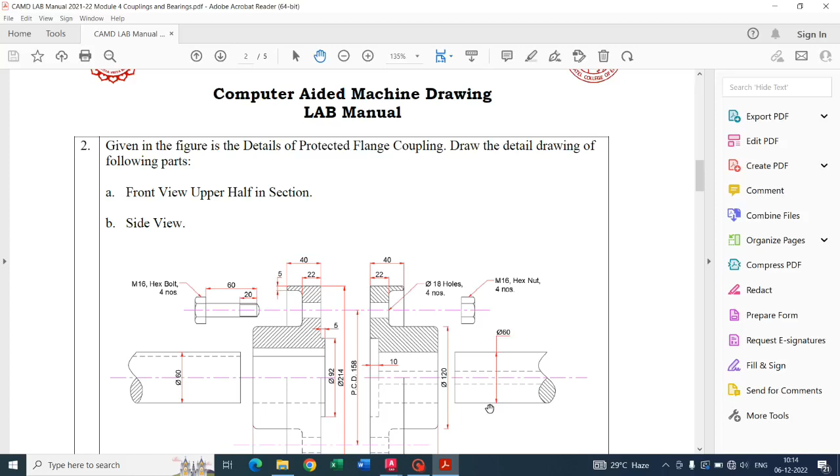Today we are going to see how to make 3D modeling of protected flange coupling. We are going to make three parts in 3D model. We are going to assemble the parts together and make the assembly, and then we have to plot the assembly drawing as given here.

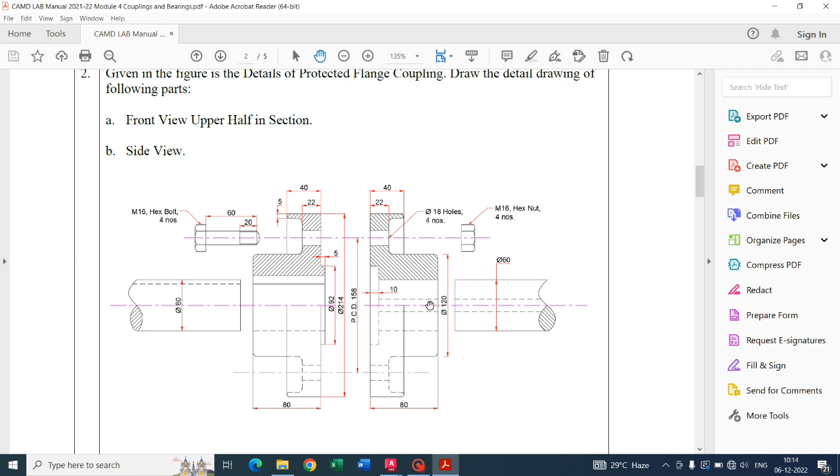So the question is, given in the figure is the details of protected flange coupling. So these are the detailed drawings of the protected flange coupling. We have to draw the assembly, not the detailed drawing. We have to assemble all the parts and draw the following: front view, upper half in section, and side view. We already have front view, upper half in section for the details. We have to assemble the parts and we have to draw the lower half.

Okay, so here we will start with the drawing. So we'll go to AutoCAD. Whenever we are opening a new file, we will make sure that we are switching to 3D modeling. Now once we are in the 3D modeling, we can see the grid, and we will change our view to southwest isometric so that we can see all three axes.

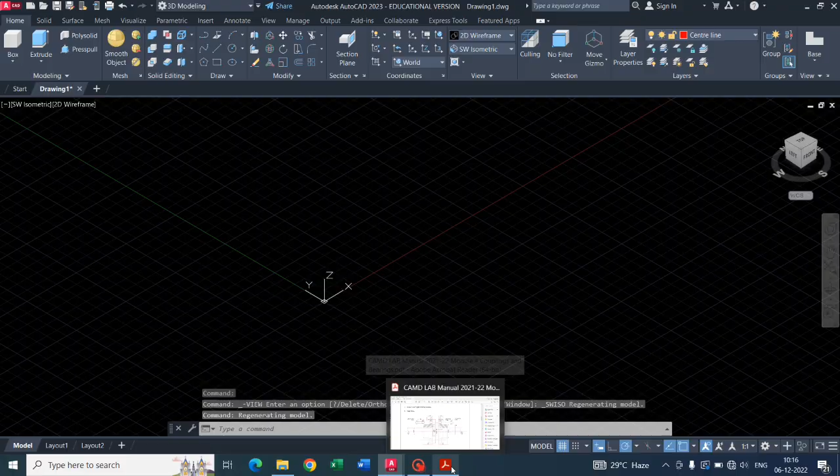Now we will see where we have to start. We will take the shaft first because it is the simplest part to be drawn. In front view, the shaft is only a rectangle. So when we have to draw a cylinder of the shaft, we will have to draw it in the left hand view because the circular face will be seen in the left hand view.

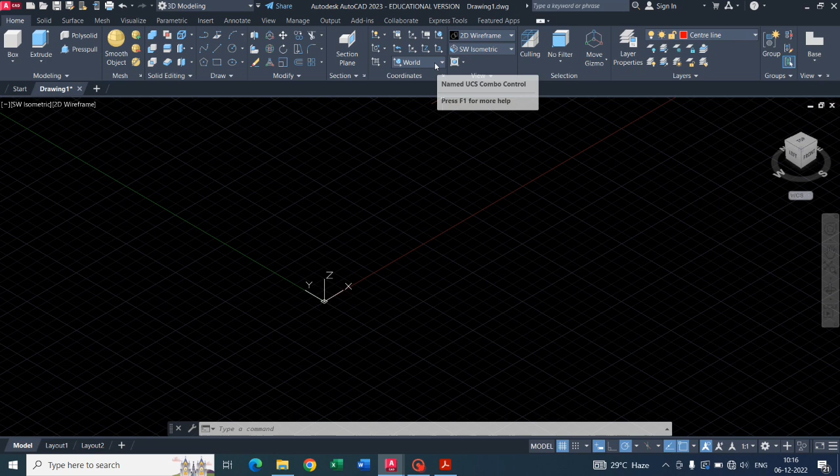And in most of the cases, for example this flange, you can see all the circular faces like the 92, 214, all these circular faces are seen in the left plane. So most of the parts of 3D modeling will be in the left plane. So first let us set this in the left plane. Our UCS will be set in the left plane, and you can see our grid is aligned in the left plane.

Now the shaft dia is 60. What should be the total length? The shaft should be inserted inside the flange in such a way that this edge should reach here, in this flange A. So this is flange A and shaft A, and respectively, this will be flange B and shaft B.

In flange A, when the shaft A goes in, the total width of the flange is 80. So our shaft should come at least something out. We will take at least 20 mm outside. So the total length of the shaft will be 80 plus 20, that will be 100. So dia 60 by 100.

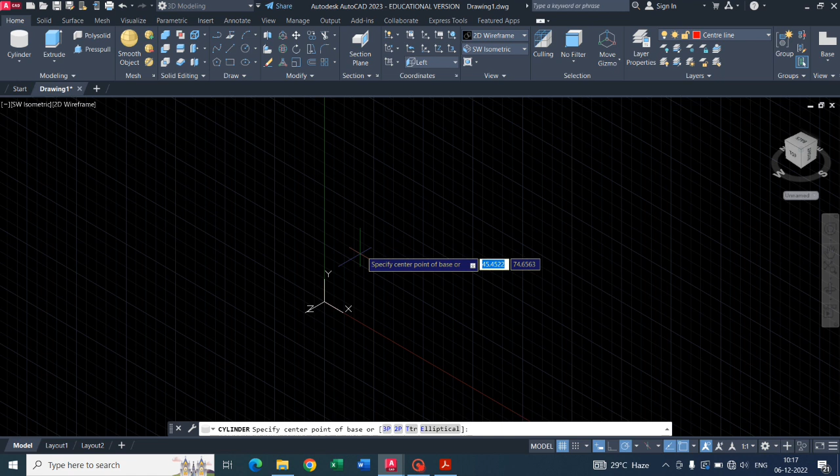So we can directly go here and make a cylinder in the left plane. Click anywhere for the circle. For diameter I will press D, enter, and I will enter diameter 60. Now I will extrude and I will enter length 100.

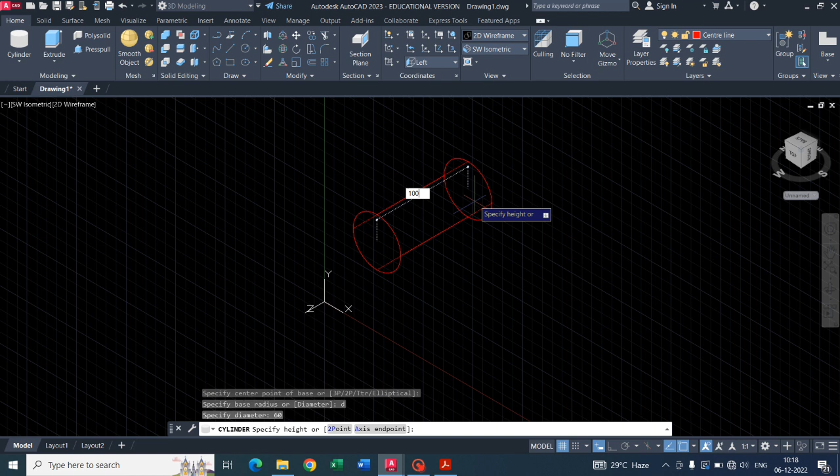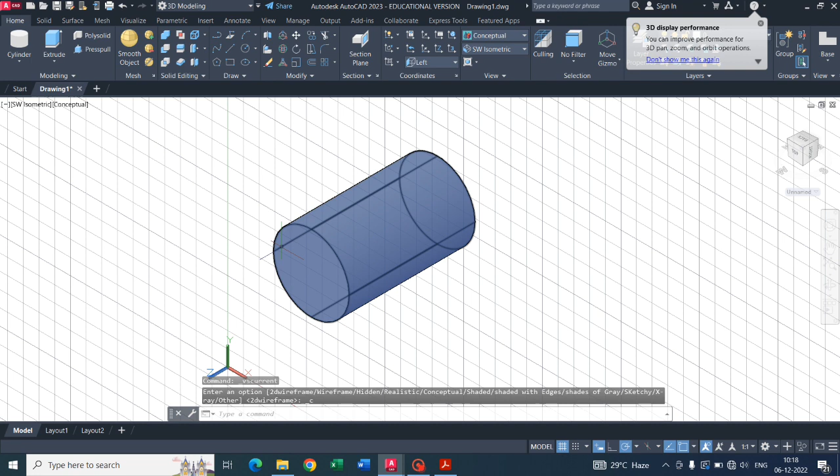My layer was in center, so I will switch it back to default layer 0, so whatever I draw is in the default layer. Now I will see this in conceptual, and you can clearly see a cylinder is created in the 3D modeling. For the time being I will switch off this grid; it is not required now. So we have the shaft.

Now what we require in the shaft is the keyway. The shaft dia is 60, so what should be the keyway dimensions? For the key dimensions, we have shaft dia capital D equal to 60.

Accordingly, the width W of the key will be D by 4, which is coming out as 15. The thickness of the key, T, is equal to 2/3 of width, so that will be 10 mm. So we have the thickness and we have the width, and we'll get all the other dimensions.

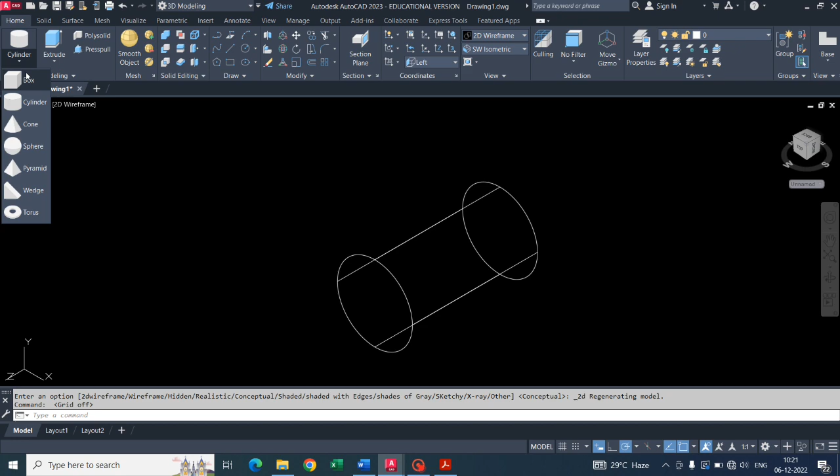Okay, so let's move back to AutoCAD and make a keyway. So in a key, first we'll make a key, and then accordingly we will align that to a shaft. So for making the key, I will directly go to the box. I'll give the cross section. My cross section is 15 by 10. So my cross section width is 15. I'll press tab, so it will go to the thickness, and 10 mm. Okay, I'll give the length.

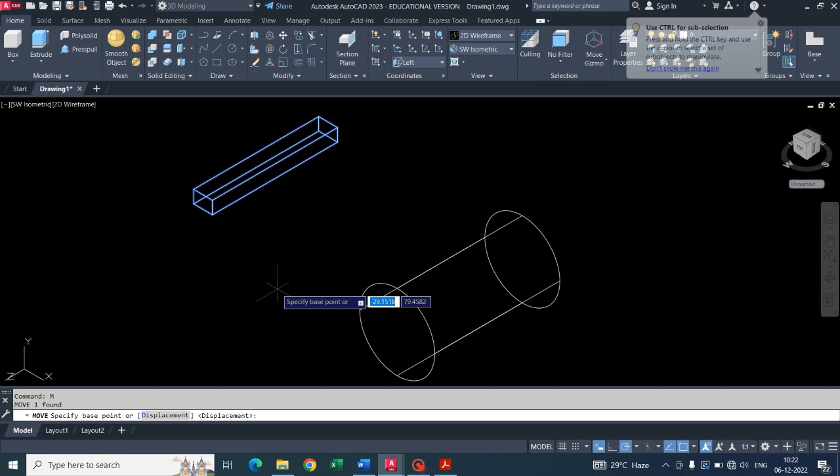The total length, right now I am making only the keyway, so according to the key dimensions, I will take 100 as the total length, which is the length of the shaft. Okay, now I will make this, and I will move this from the half. You will get a center point. If not, you can make a line like this, and you will get the center point of it.

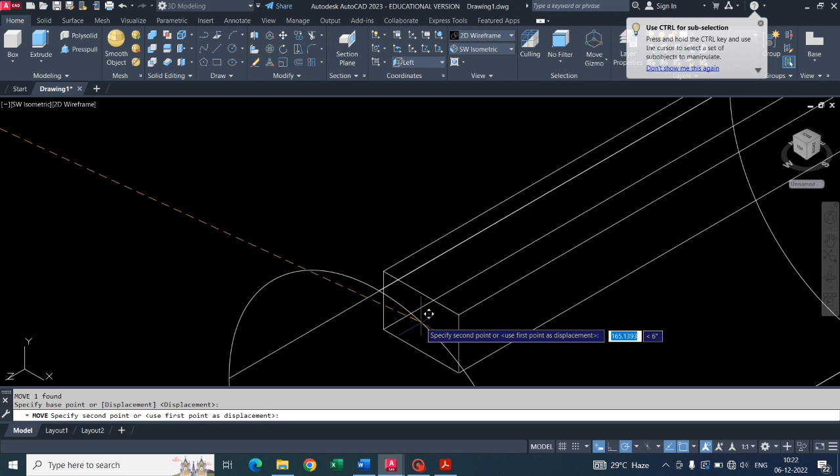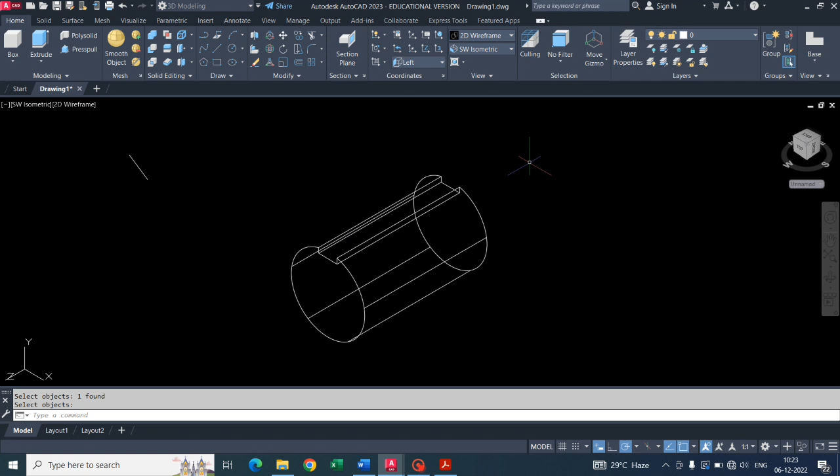So select, move from the center, that is the midpoint of this line, and put it on the quadrant point. You can see this is the quadrant point of the shaft. At the half, so you have half outside and half inside. Now I'll make the slot. In order to make the slot, I will use the command subtract. Select the solid, that is the cylinder first, press enter, and then select the keyway and then press enter. So here's the keyway that is ready for us.

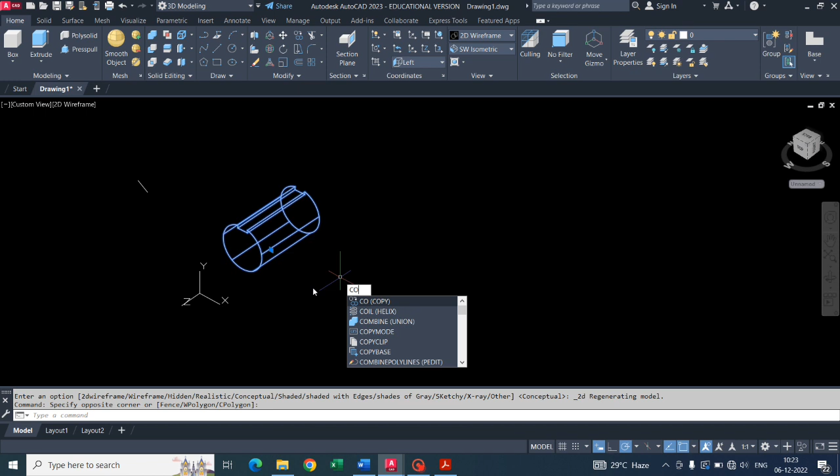It is a through and through keyway. It is not ending in between. It is through and through along the length. So similarly we want one more shaft, because if we see the details, it is on the other side. Only that this shaft will be rotated because the keyway is rotated. Here you can see the thickness of the keyway, whereas here you can see the width of the keyway. So I will take one more shaft. I will make one more copy of this.

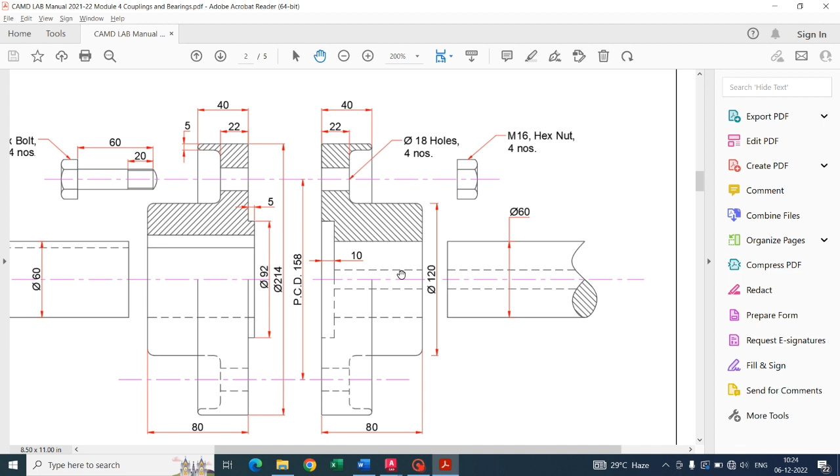And rotate it. Now where to rotate? Whether it is in front or back. So from this keyway, you can see here the details. It is clearly seen that even if the section is done, the slot is not visible towards the front, or towards the observer who is looking towards this particular flange. So obviously the keyway is on the back side. So we have to rotate this keyway on this side, because this is going to be our front, this is front, this is back.

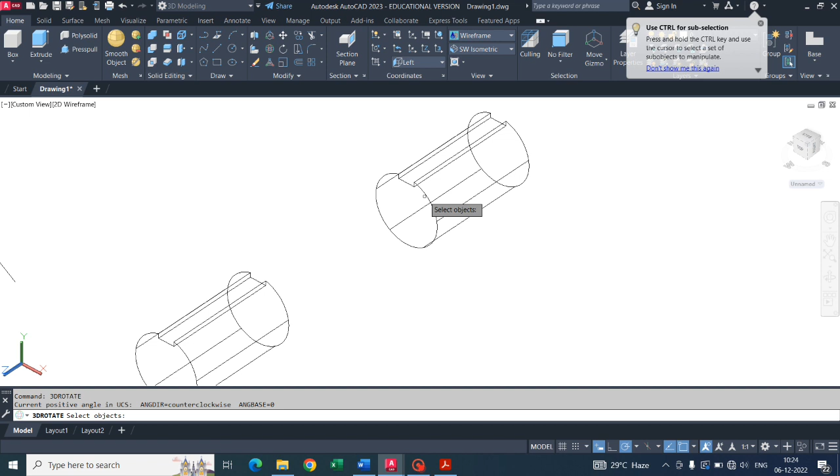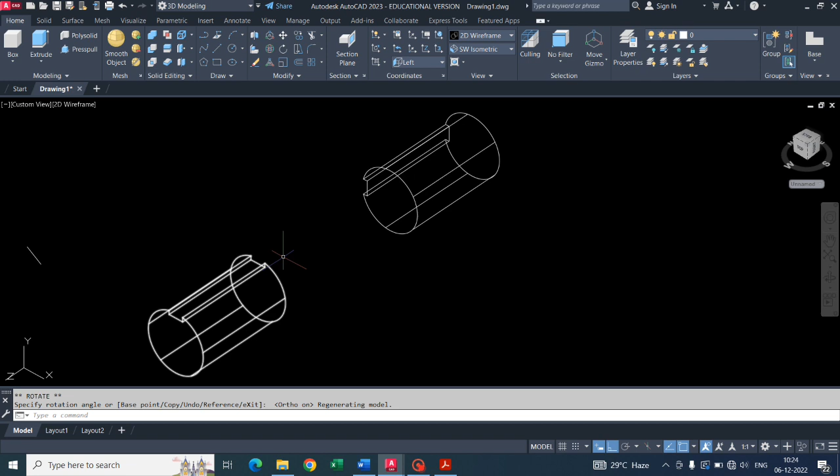So let us do 3DR, that is 3D rotate. Select this, select the proper axis of rotation, and in my case I'm taking this red color. You can also click on the ortho mode so that you can see here the preview. And rotate it. So one shaft is having keyway at the top, the other on the back side. So two shafts are ready.

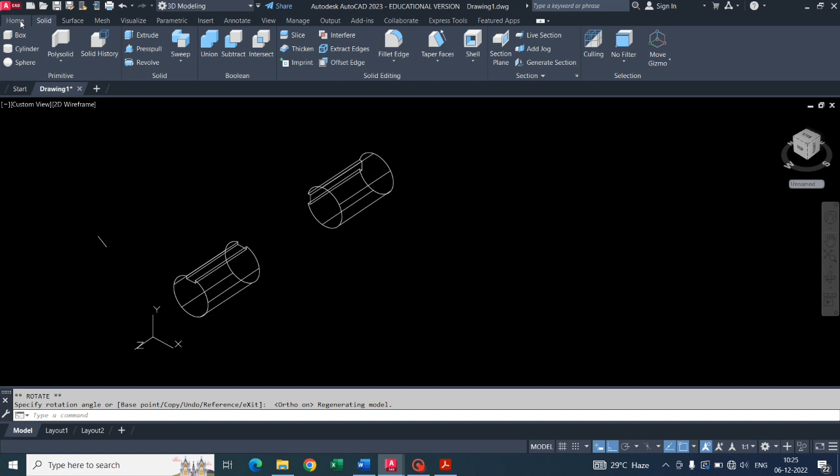Now I have to make the flange. In order to make the flange, first we will start with the dia 92 and 5. So I will go with dia 92. I will make a cylinder, again dia 92, and the thickness is 5 mm. So we have the cylinder of dia 92 and thickness 5 mm.

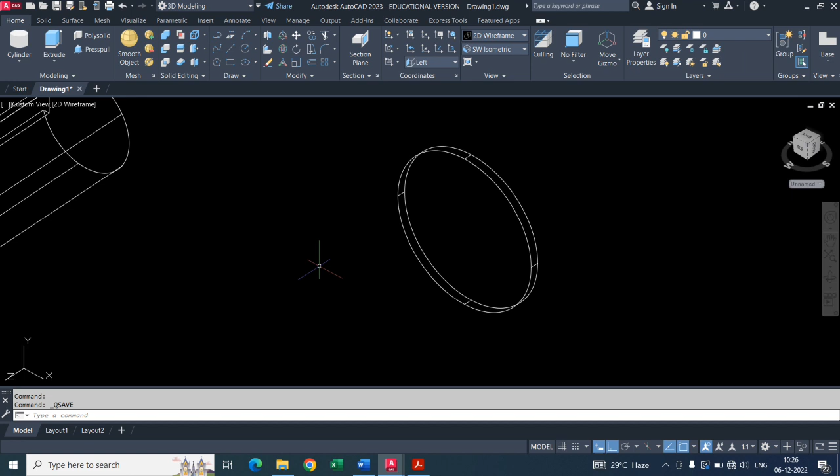So now we are going to make the flange, but before making the flange I will save my work. Saving your work is very important. I will save my work giving a file name. Do save your work regularly. It is just a matter of pressing Ctrl S on the keyboard, which will save your work.

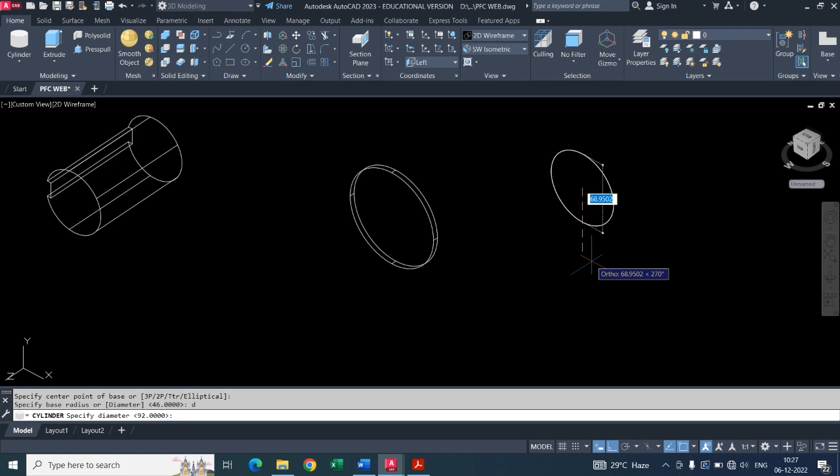Now here we have already drawn the dia 92 and 5. The next cylinder we are going to take is the dia 214, the outer cylinder, with thickness 40. So draw the cylinder anywhere and then we can move it. Dia 214 and thickness 40.

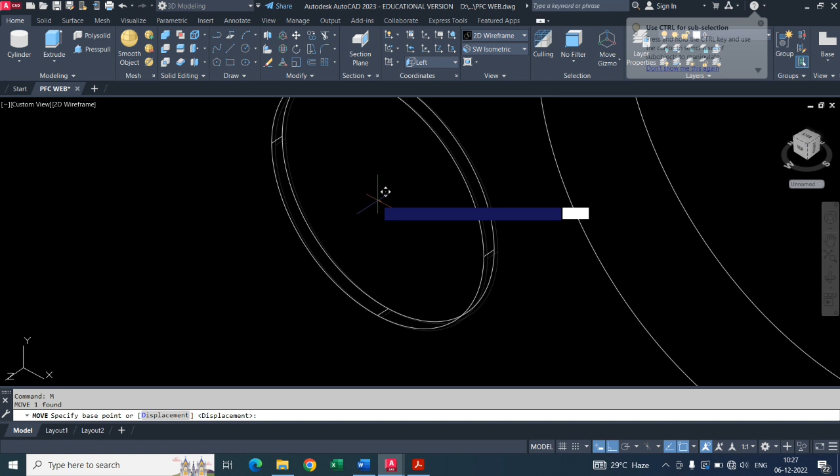Now we have to merge these two cylinders, dia 92 and dia 214. So we will merge this. I will take the center from the two and put the first one on the back, because these two centers are concentric to each other.

Now the next cylinder we have to make is the inner cylinder. For the inner cylinder, the diameter would be 214 minus 5 on this side, and minus 5 on the other side, so total minus 10. The total diameter comes around 204. So I will make a cylinder of dia 204.

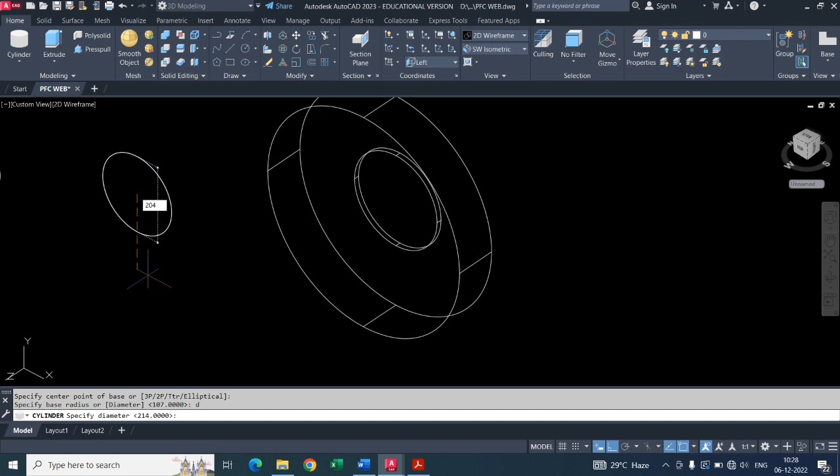What is the thickness? Thickness is 40 minus 22, that is 18, the remaining one. So 18, 18. Move this in such a way that we are taking the front face of this cylinder to the front face of the 214 cylinder.

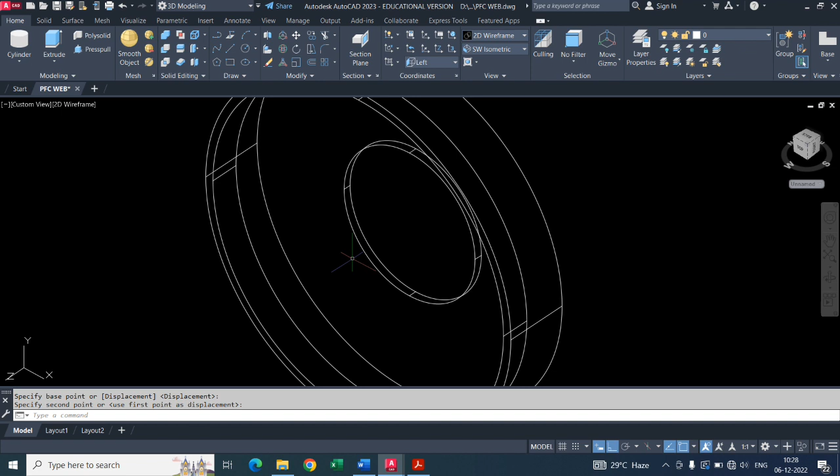When we see this in 3D, in the conceptual mode, they are merging into each other because we want a slot. So you can see this is the slot that is freed up, in order to create a rim.

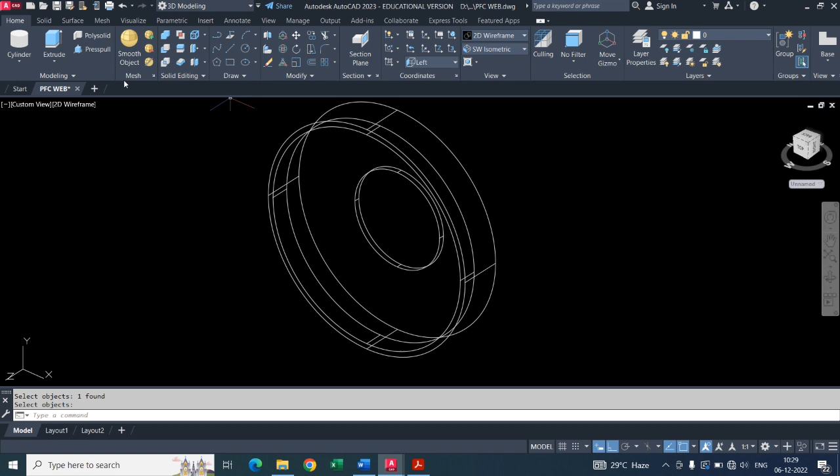Now we will go to subtract and make that rim. I will select the outer body first, press enter, then the inner body, press enter. And if you see now in conceptual, we have our rim which is ready.

Next we have the hub. The total diameter of the hub is given as 120. The total thickness, we can start from here. If we start from here, the total thickness will be 80, minus 22, which comes around 58. So this total length will be 58. So I will make one more cylinder.

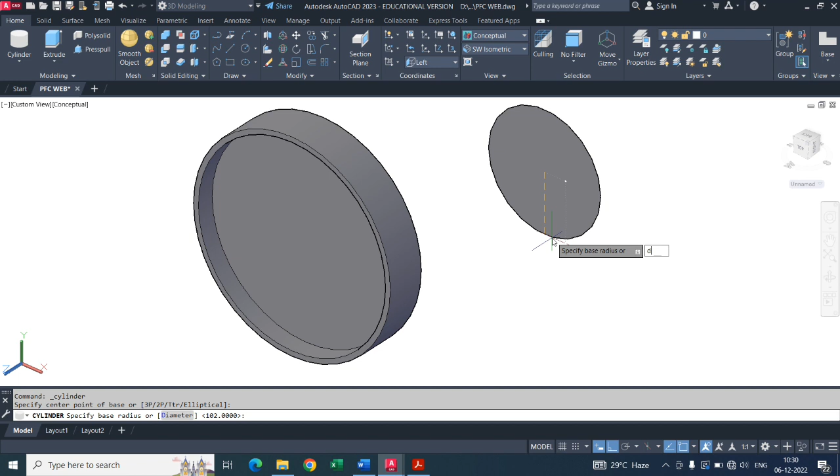Cylinder dia 120 and thickness 58. Once this is done, move this from the center to the center here, and check whether it is coming on the same center or not. Yeah, okay.

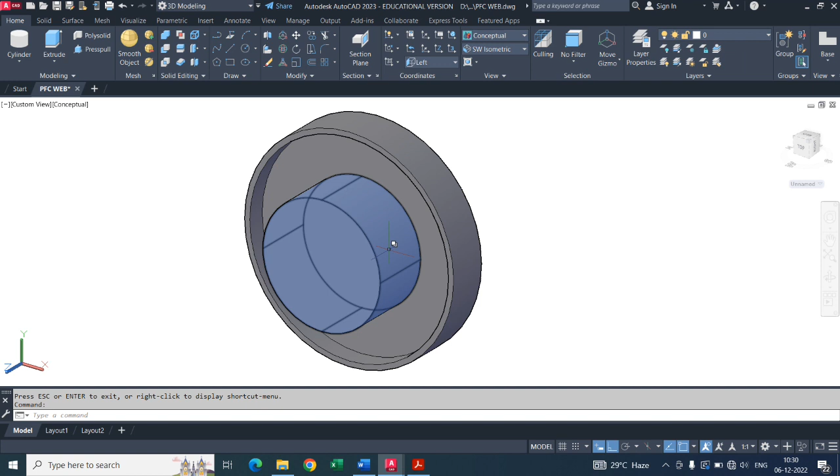Before we create these holes, what we'll do is first make a union, because these three cylinders, one, two, and three, are separate parts. So I will select union, select all these three cylinders, and press enter. So they are one part or one object now.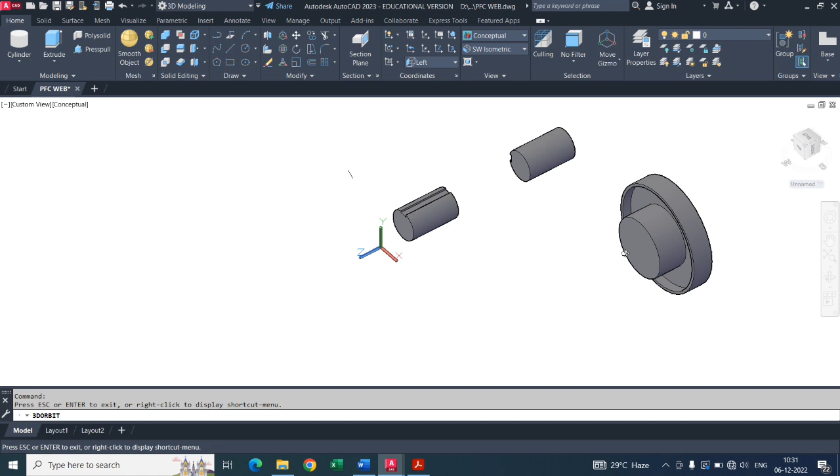Before doing any fillets, we have to make sure that we are doing this union function, so that the fillet direction will be correct.

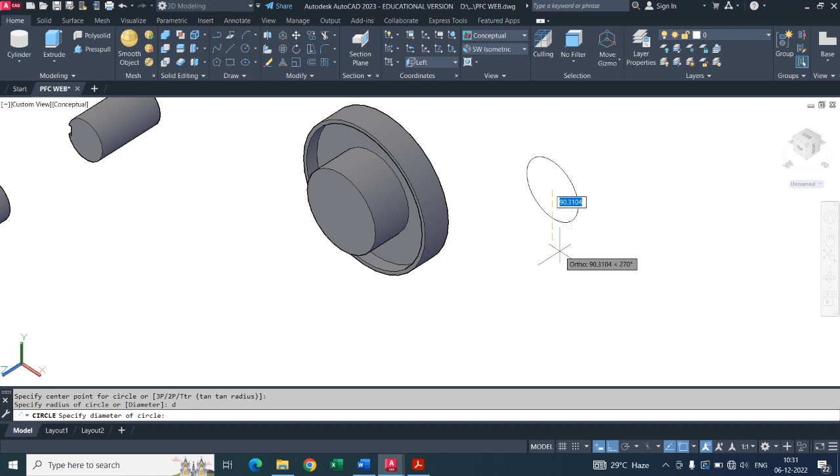Next we are going to make these holes, the holes for the bolt that will go through. These holes are given as dia 18, 4 numbers, with a PCD of 158. So first we will make a PCD circle of dia 158, which is the PCD.

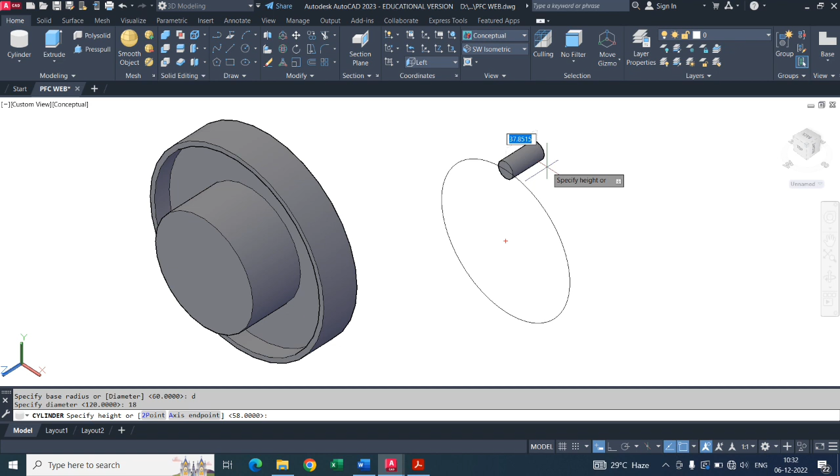Now I will make a cylinder of the same size, dia 18 by 22. I can take the length a little bit more, so dia 18 and length maybe 25, because we have a through hole.

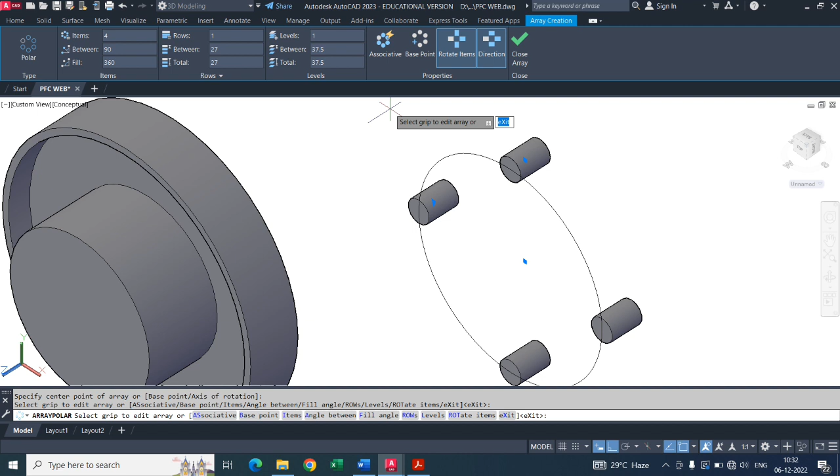Now here you can see 4 number of holes, and you will use array polar. Select this and give the center of the polar. Number of items is 4. Just click here and automatically it will take the 90 degrees. Make sure associative is unchecked, this is checked, this is unchecked, because we want all these bodies to be individual. Close array, and we have all these individual bodies here.

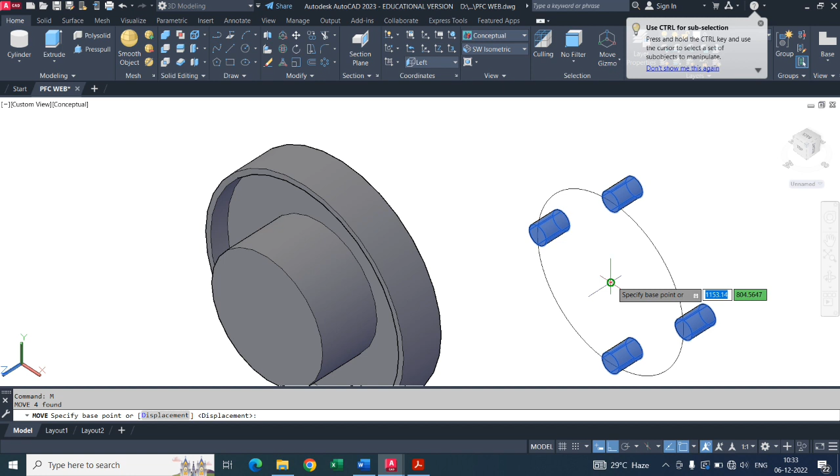Now these bodies are to be transferred onto this surface here. So I will select this one, two, select this, and move from here, from the center, and place it at this center.

Okay, so they are aligned properly with the face. This side will come out by 3 mm because we have given 25 mm as the length.

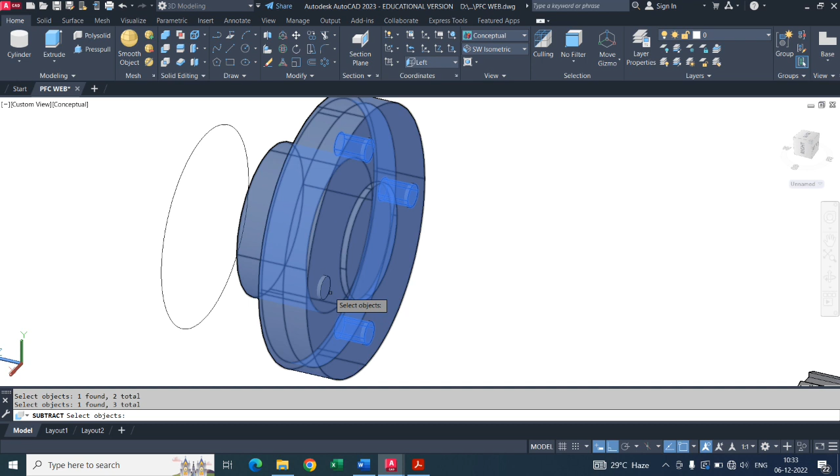Now I will have to select them and subtract them because we need to create a hole. So subtract, select this outer body first, press enter, select these cylinders, you can filter out, select the bodies properly, and 4, okay, then press enter. So you have the holes ready.

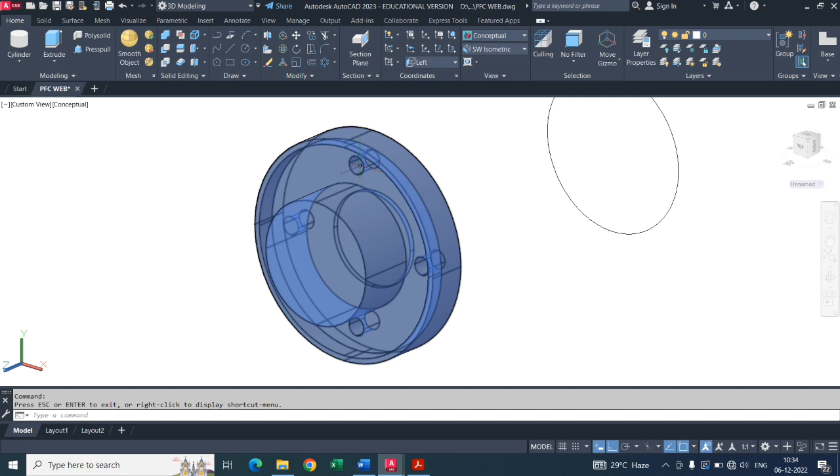Make sure they are through holes. Yes, okay. Next is we are going to make the shaft hole here.

Okay, so now we are going to make the shaft slot. The shaft slot is dia 60, but we also see here that there is a keyway in the hub. So we have to make that also. Along with the shaft hole, we will also make the keyway, and then we will subtract it together.

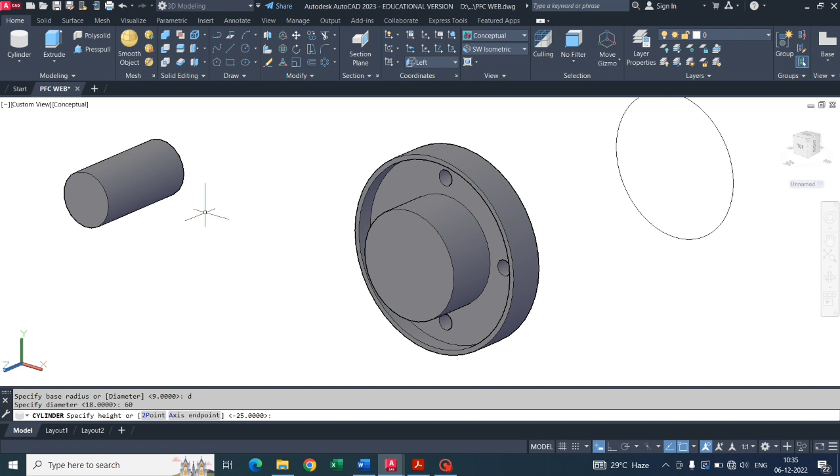So first I will make a shaft, same size, dia 60 and length 120. I'll make it longer only because it has to go outside, because total is 80 plus 5, 85. So you can take 100 also, no problem. Double click here and I can change this size to 100.

Now I will make the key. I'll go to box, give the key size 15 by 10, that is the cross section, and this is also 100. Once this is done, I will move this again, same thing, from the center to the quadrant point.

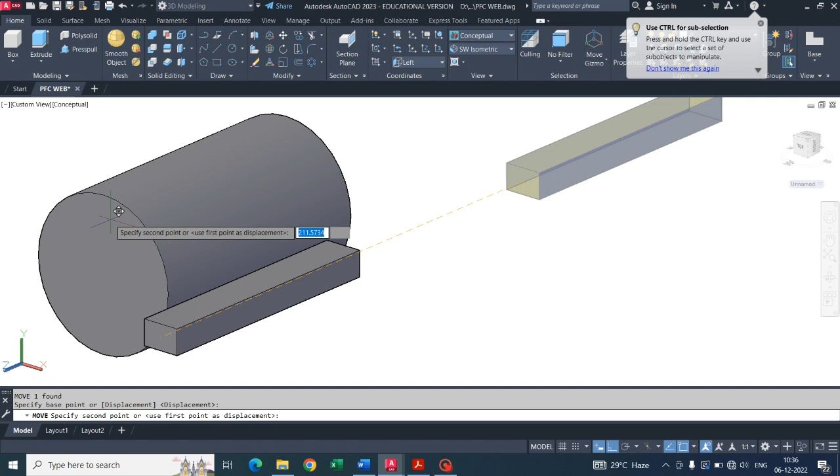Now instead of subtract which we did for the shaft, here we are going to make union. I'll go to union, select both these solids and press enter. Now after this I will say move.

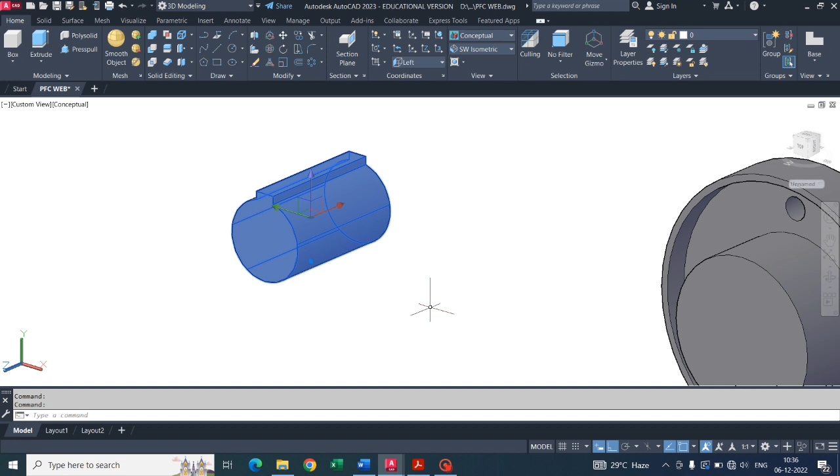Move from the center and place it on the center. So in this way we will be able to create the shaft hole and the keyway both together.

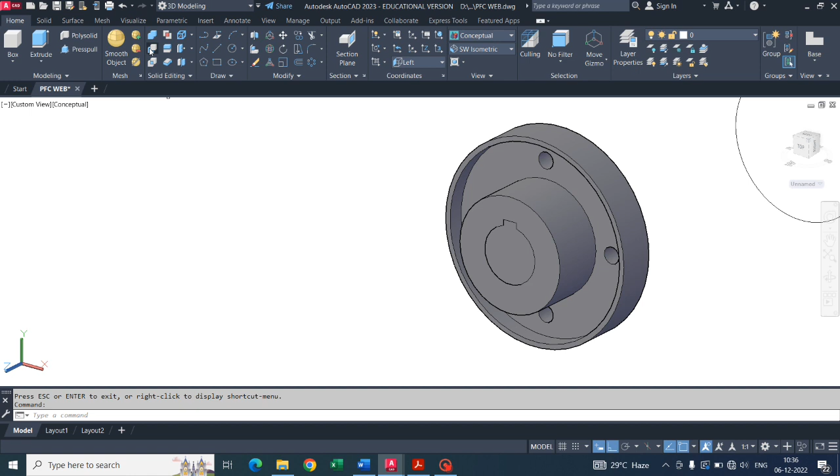Now here I will make the subtract, outer body minus the shaft, select it one side, then press enter. So our shaft hole as well as the keyway is ready.

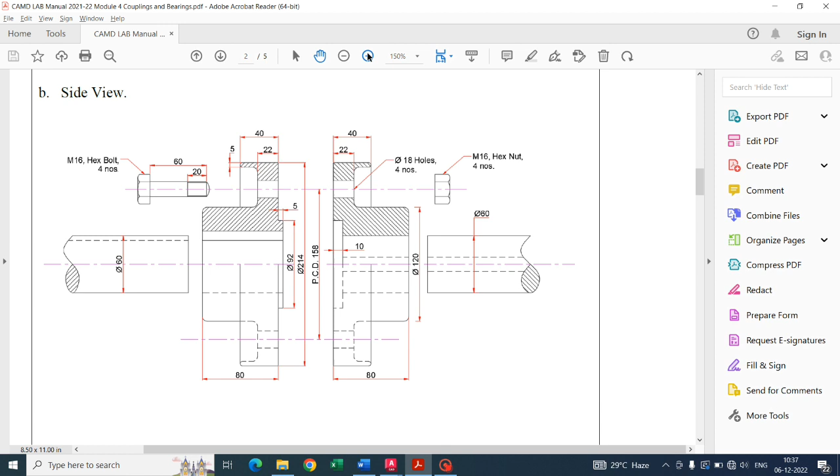Now the only thing that is left in this flange is the fillets. If you see the fillet, you can see the fillet diameter here, the total thickness is 5, means the diameter here is 5. So obviously the radius of the fillet will be half of it, that is 2.5. So everywhere I will take that radius as 2.5.

So I will go to flange and say solid fillet edge, select, go to radius and change the fillet because my default radius is 1. So always change the radius first, 2.5, press enter.

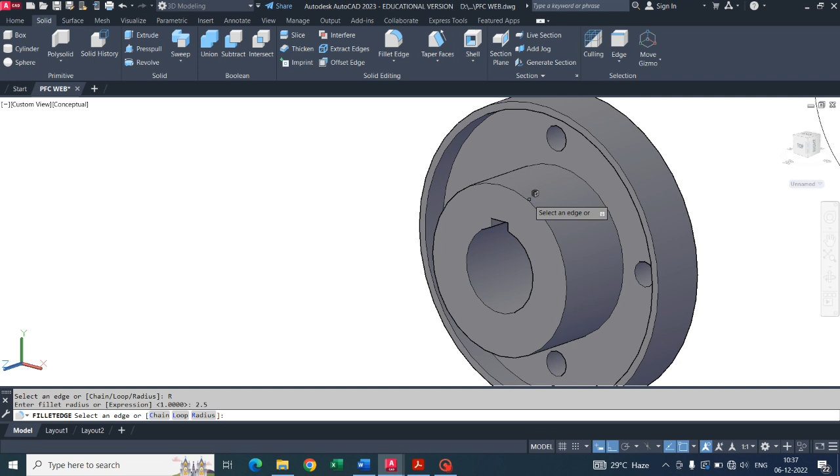Now select the edges. You can also check which edges are there. So 1, 2, 3, 4 and 5 edges are there. I will select 1, 2, 3, 4 and 5, total 5 selected edges.

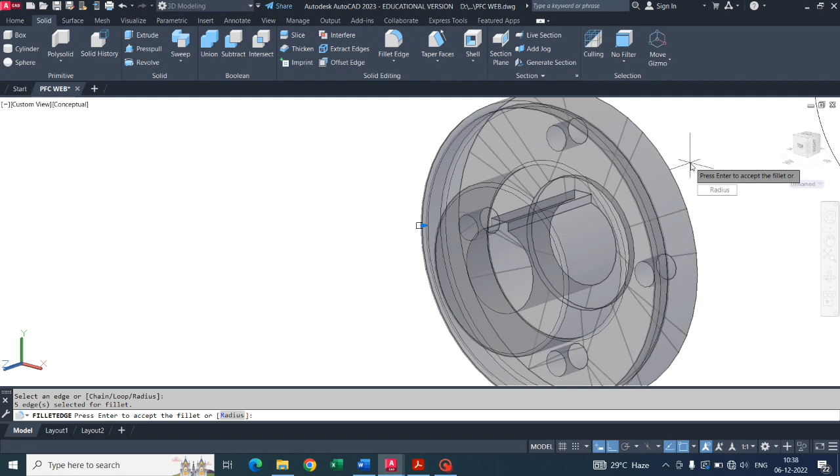Press enter once so you get a preview, and press enter again to complete the fillet command. And you have the fillet on the flange.

Now we will create flange B for this. You can see flange B is just a mirror image, except the correction that this dia 92 is extruded here, and here we have the cavity of that extruded part. So we have dia 92, and the cavity thickness is 10 mm, or cavity depth is 10 mm.

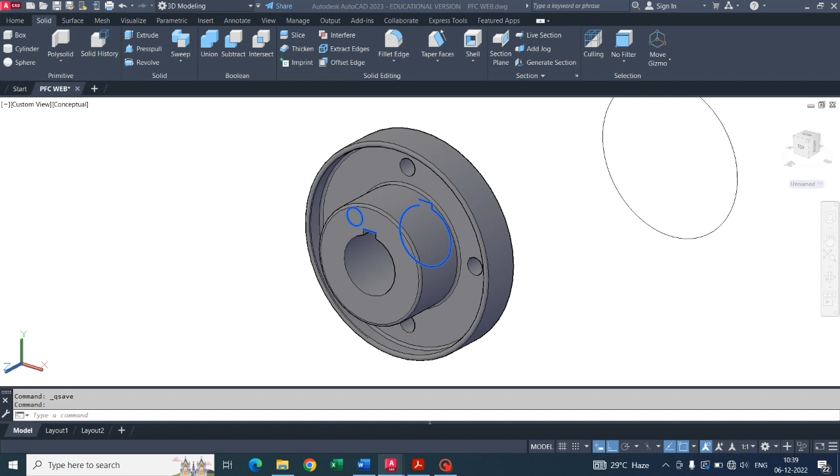So first we will make a mirror image, and in order to do that I will take help of this circle only, or maybe a plane. So I will need a 3-point plane for that.

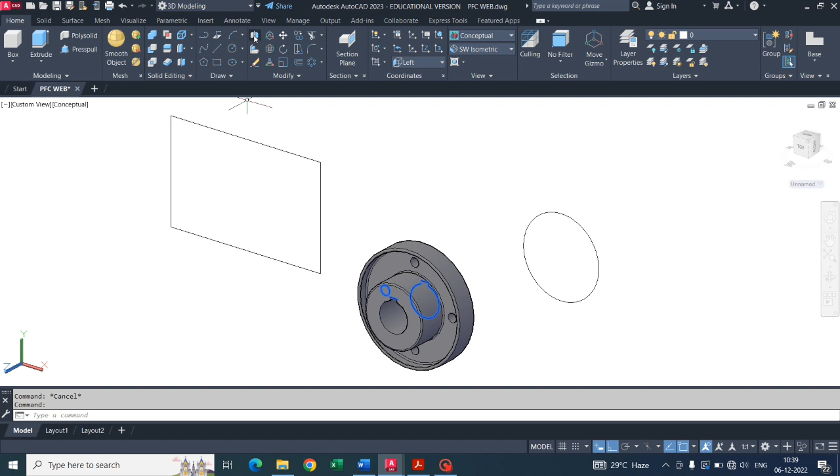So let's make a plane, just a rectangle in the left plane itself. This is going to be my mirror plane. Now I will go to mirror, 3D mirror, select the flange, press enter.

Now it is asking me the 3 points of the mirror plane. So I will give 1, 2 and these 3 points. Do you want to delete the source? No, I want a copy of it, and you can see there is immediately one created.

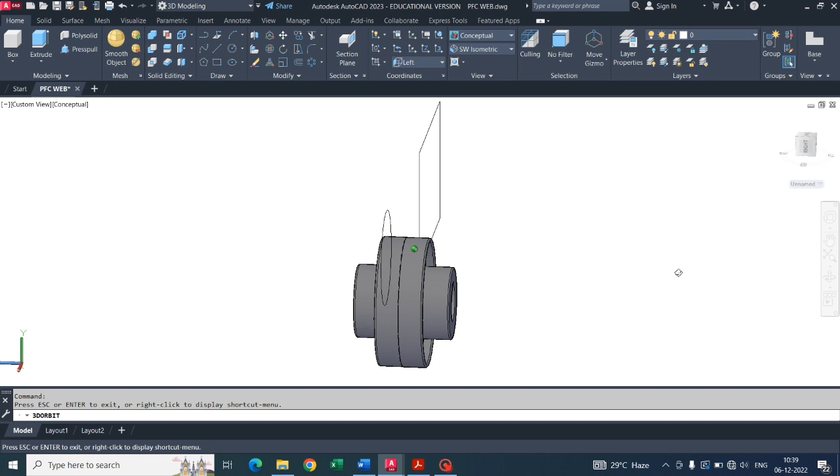Now the only thing is we have to move this a little bit outside, then we have to correct this. We need a cavity and then we will pull it back to its position.

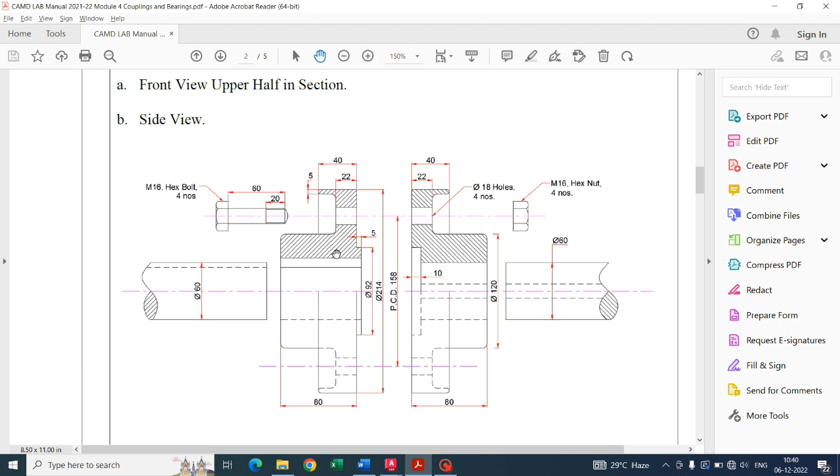So let's make the cavity. If we see the cavity, we just have to make a dia 92 cylinder, but not of thickness 10. It is thickness 10 but plus 5 mm, so this will go inside, subtract 5 mm and then 10 mm.

So it is total 15 mm. So cylinder dia 92 and thickness 15 mm. Select this and move this to our position, to the last face.

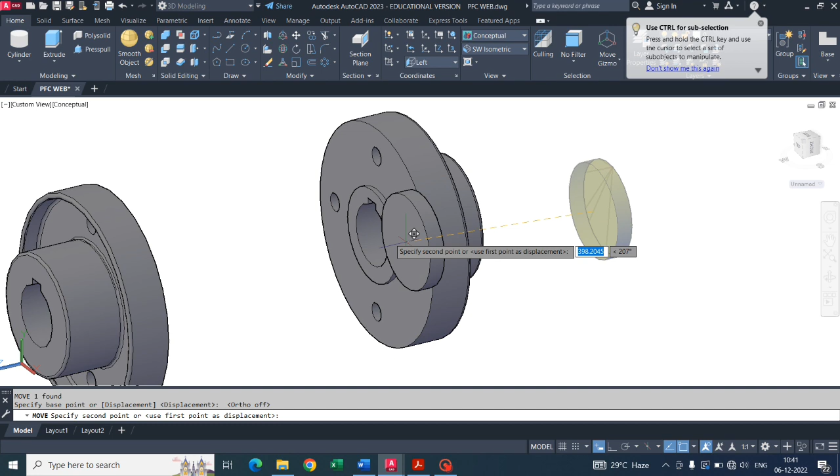After moving, we'll check whether it is perfect. Now I will make the subtract function. Select the outer body, select the inner body, press enter, and we have the cavity ready.

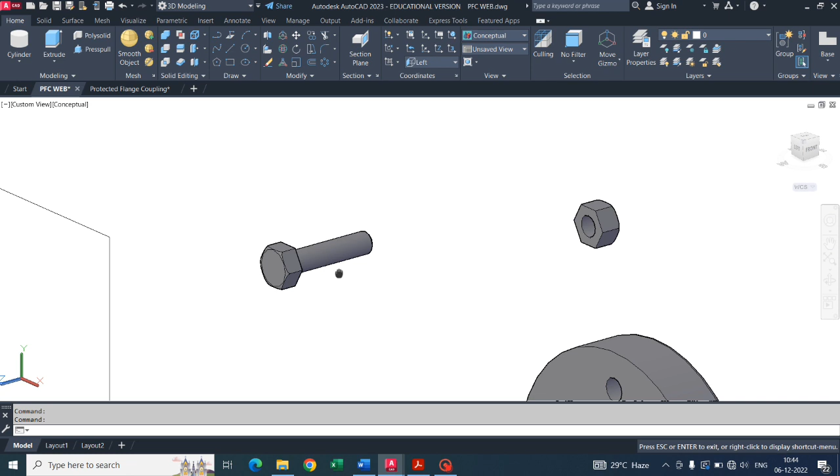After making the shafts and flanges, we can also make this hexagonal bolt and nut. I have already shown you videos of how to make the nut and bolt, so you can go there and see it. I'll save time here. We want four bolts, so we will make copies of this on the same PCD.

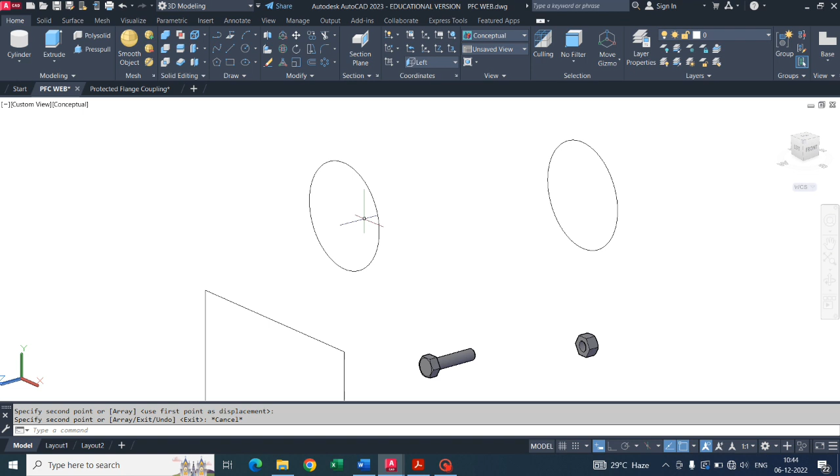I will make a circle of diameter 158. I will make one more copy of this because I want one for the bolt and the other for the nut. Instead of copying, I will move this from the center of the neck and place it on the top quadrant. Similarly, for the nut, copy.

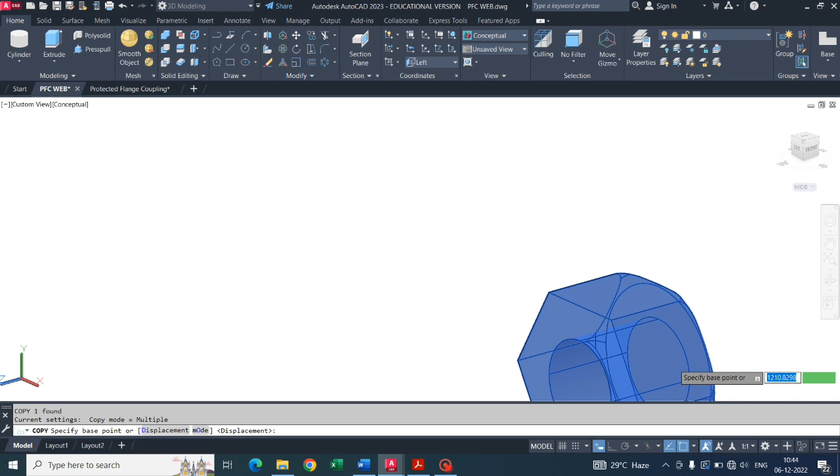You can see the fillet is on the opposite side. I will take it from the center of the back face and put it on the quadrant. Now I will make the polar array for the bolt first, and a polar array for the nut afterwards.

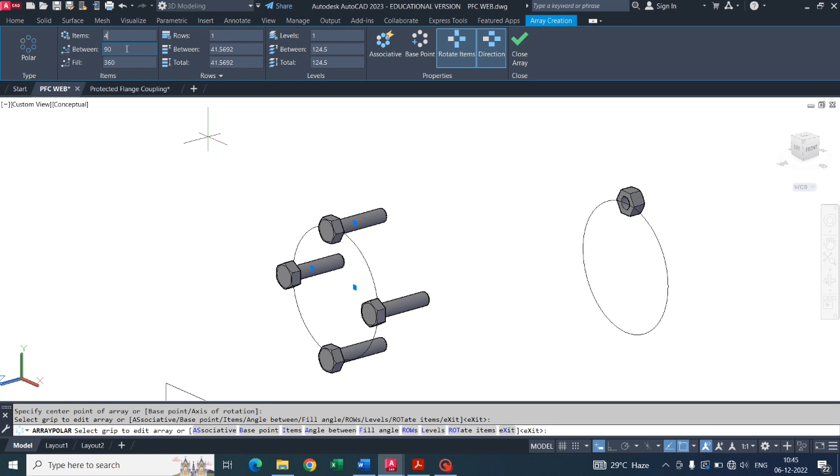For the bolt first, select the body, select the center, we know it is 4 items, and associativity is checked. Close array. Repeat the same for the nut: select polar array, select the body, select the center, select 4 numbers, and close array.

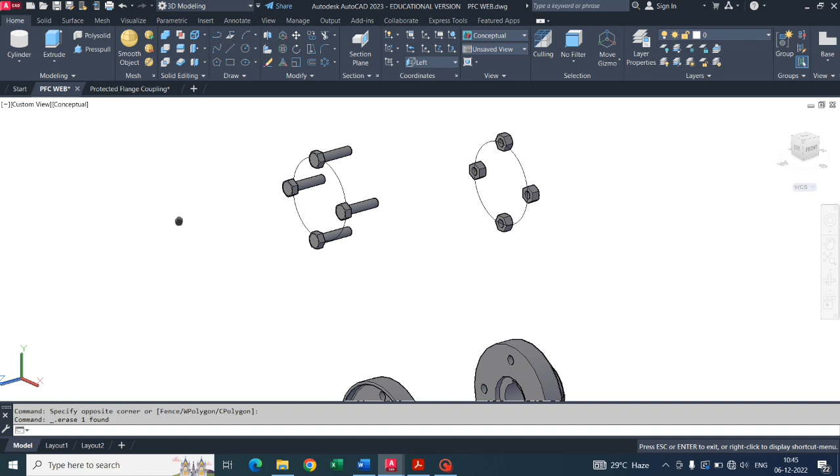After this, we will make the key. We already have the key dimensions here. The only thing is we need to make this key in the 3D model, so I'll show you the 2D of the 3D model.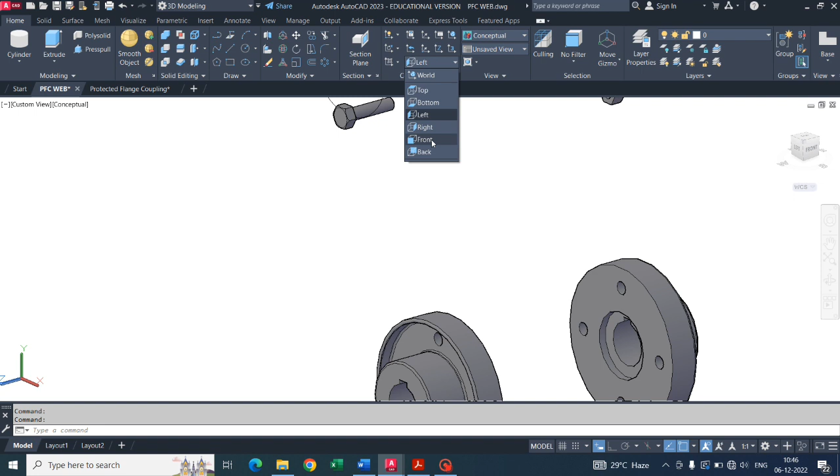In order to make the key, first we will go to the front view, changing from left to front because our key profile will be seen in front, and then we will extrude that in the thickness. First I will take the line and give the total length, and activate this.

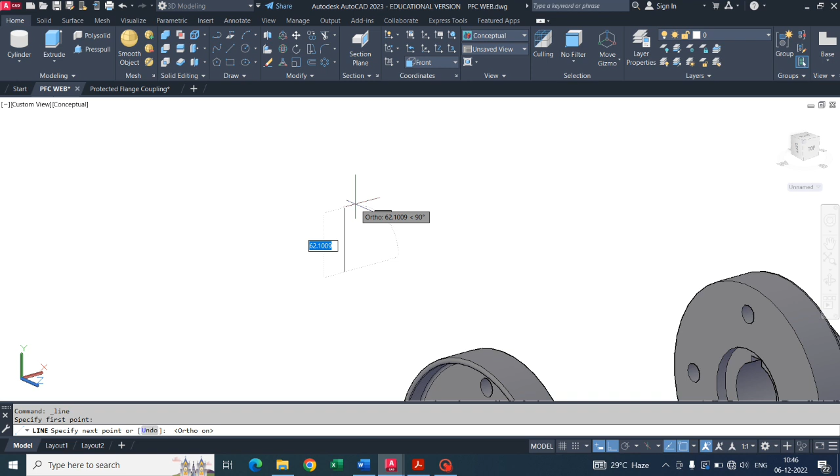Now I'll give the total length and total height. Total height of the head is 17.5, so I will make this into two halves: the first half will be 10 mm, which is the actual thickness of the key, and the next is 7.5.

So I will have two lines here: the top one is 7.5, the bottom one is 10. Now the key width at the head is 15, that is B, so I will take this as 15.

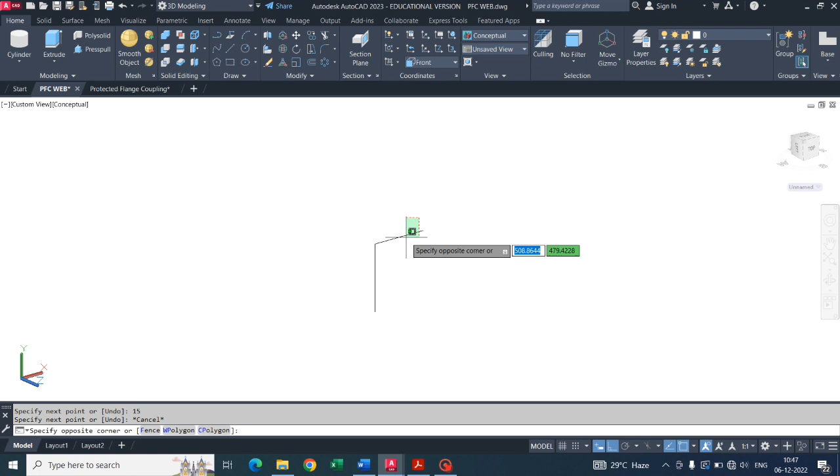Next I will bring this down by 7.5 again, and from here the total length will be 70 — this is the square portion of the width. The remaining part is 10 again, coming down and then joining here.

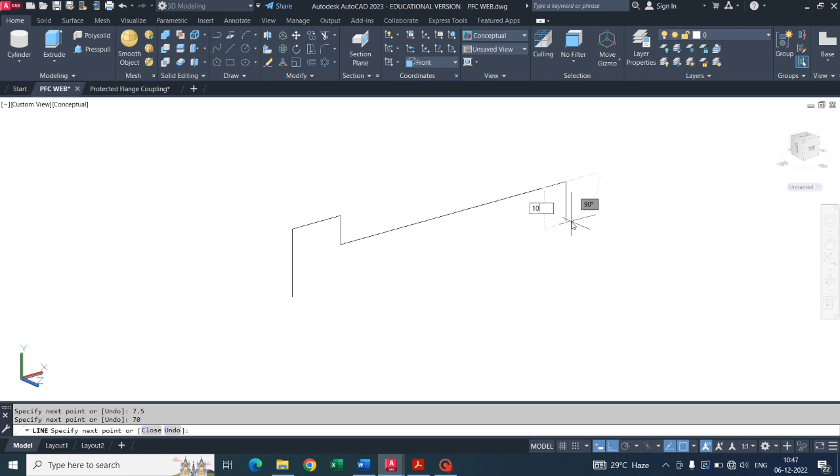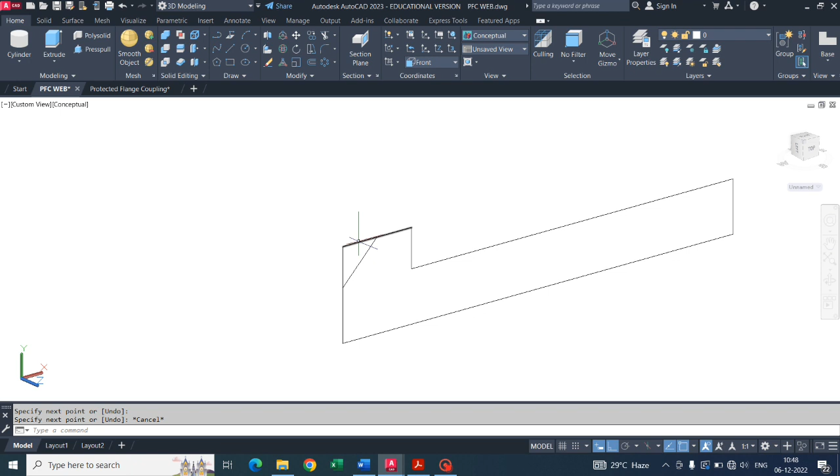We can make this: I will have a line of 10, the end point of 10 and the midpoint of this, and join them with a line so that I can get a 45-degree angle, because this is also 7.5 and this is also 7.5. Once this is done, I will use the trim command to trim the edges I don't want — my profile for the jib headed key is ready.

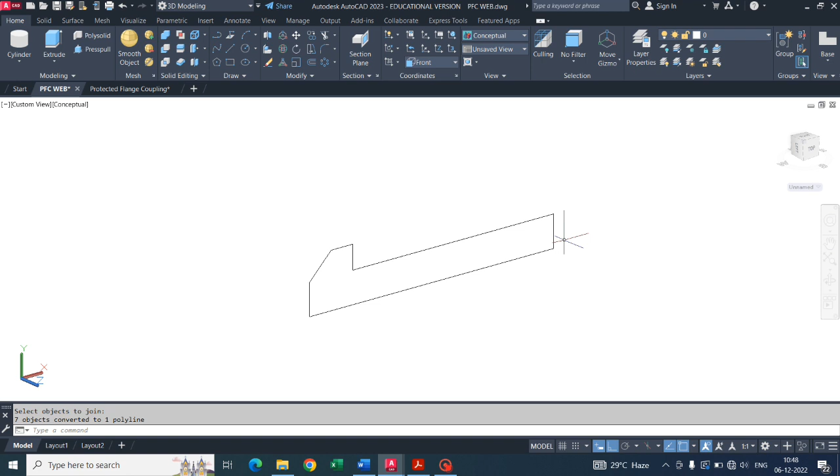I'll use the join command first, then extrude. Join, so it becomes one edge now, and then I can extrude this into the thickness — the width of the key is 15, so we use that. So the key is ready.

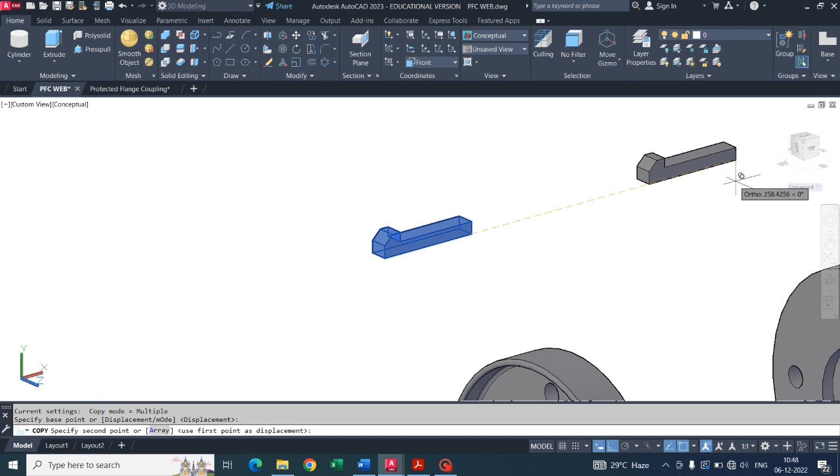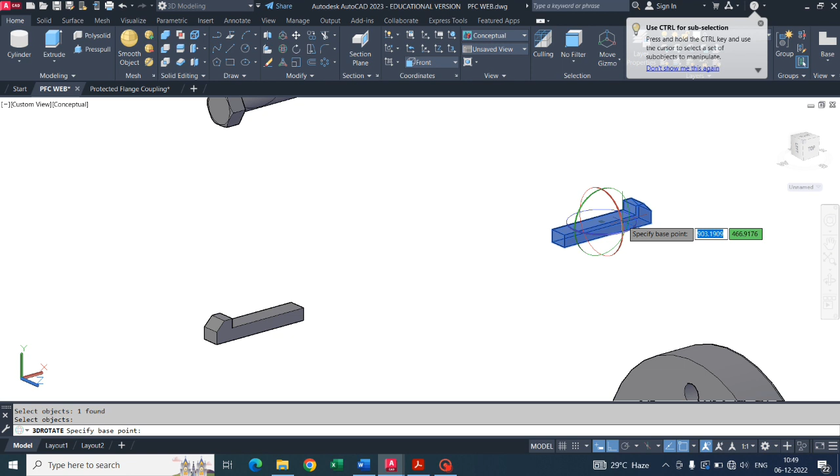We want one more key copy because there are two shafts, so one more key, and this key will be rotated on the other side as per the keyway. First I will make a mirror image, rotate by 180 to get the mirror image, and then rotate it per the shaft alignment so the head goes on the other side, as you can see here.

So all the details of the part modeling of the protected flange coupling are ready. Our next video will consist of how to make the assembly of the protected flange coupling.